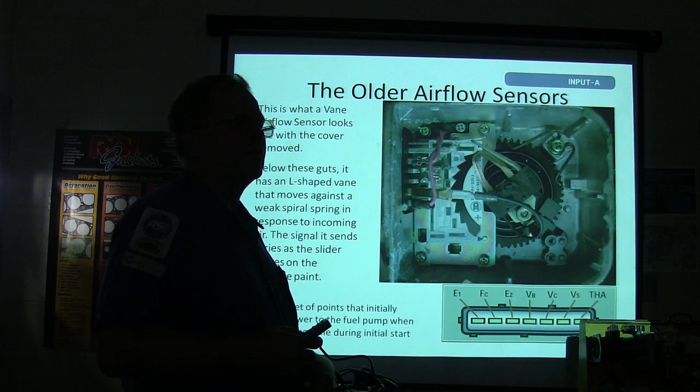Now I'll talk about airflow sensors. This is what an older vane airflow sensor looked like. This thing originally was a Bosch design, I believe. Whenever I was working at a Volkswagen dealership, there was a little screw on the side that you adjusted to trim this thing. We would actually have to put an exhaust gas analyzer on there, with a little port you stuck it onto, and you were supposed to turn that adjustment screw until your CO was at 1%. That was back in the 80s.

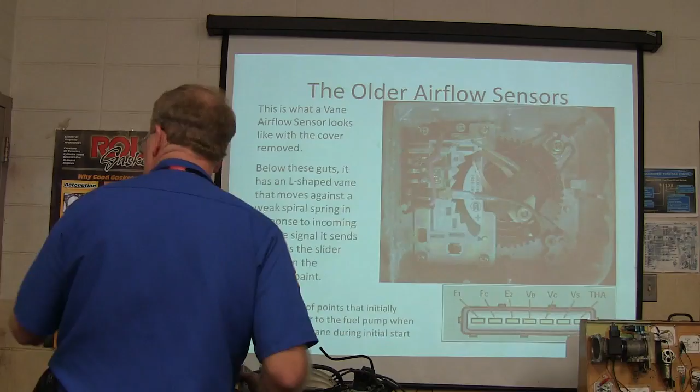But this particular thing, I want you to particularly pay attention to. There was an L-shaped vane hooked up underneath this, and as the air came through and moved that L-shaped vane, it slid on that resistive paint, and that gave you your voltage change. It's kind of like a TP sensor, but it was driven by air.

You notice this little stiff metal right here that's holding that set of points open. There's a little set of points there you can barely see. That set of points is activated if there was no air going through there. This particular one's made by Nippon Denso, but it's similar to all the ones that look like it. It would actually operate the fuel pump across these 2 points.

So these 2 wires right here went to the fuel pump. If you were going to unplug this thing and try to run the vehicle without it, you'd have to jump around those 2 wires at that connector. You didn't know which ones they were. Don't just indiscriminately be jumping wires at a connector because you think it'd be easy, because it won't be. You may burn something up like that. So be careful about which wires you jump.

Now it's got an L-shaped vane that moves against a weak spiral spring in response to incoming air, and the signal it sends varies as the slider moves on the resistive paint. You can actually reach in there and move that thing with your finger.

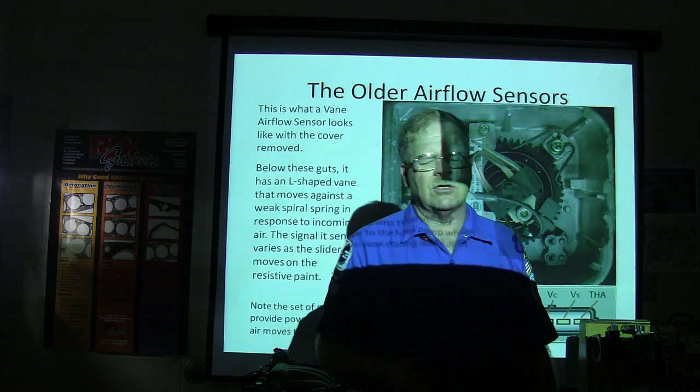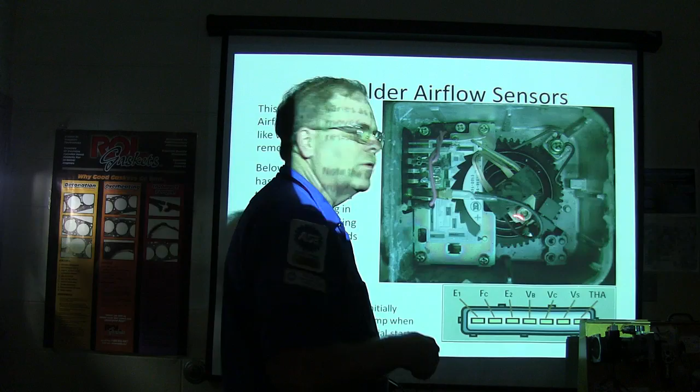Some of the older Volkswagens had it. The very first, there were some Escort GTs that had this kind of deal on them when I was working at Ford Place back in the early 80s. That thing right there is almost gone now. A lot of your Toyotas used it. This particular one I took a picture of was on a Toyota MR2 that we worked on here. That little set of points that operates the fuel pump right there basically gives you fuel to start with.

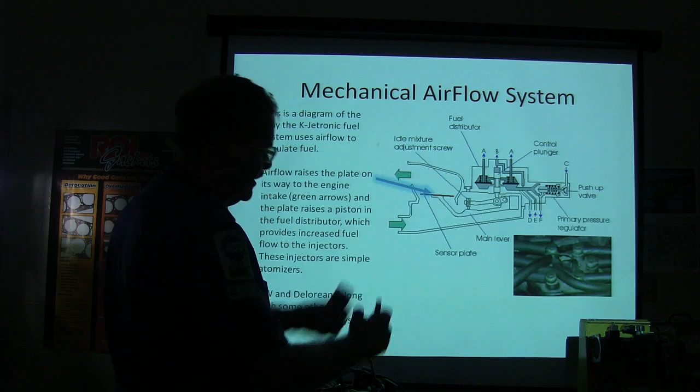Now this right here is a mechanical airflow system, right? It's a diagram of the K-Jetronic fuel system. What you got right here is a sensor plate. Air is coming in here, it picks up on that sensor plate, which is about as big around as the top of a 1-pound coffee can. It raises it up, and you notice this is the way it's shaped. The higher it goes, the less resistance it offers because air can go around it.

Right over here, that's an adjustment screw right there, and it's sitting on a little piston. That piston, as it goes up, opens up and lets more fuel go to the injector. There's a fuel distributor right here, and that doesn't turn or anything. It's just that each one of those lines goes to an injector. It's basically an atomizer.

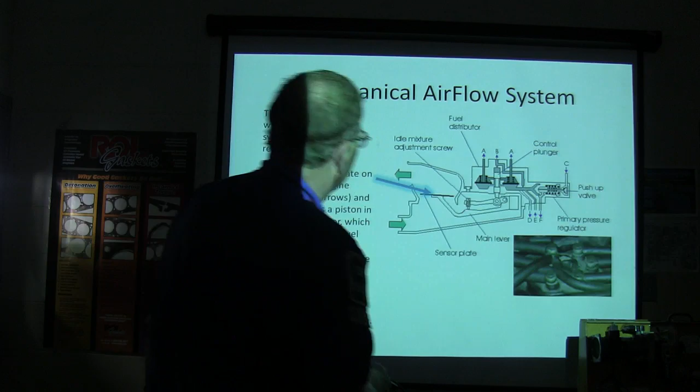So I worked on these over there too. This is one that was on the Volkswagen Rabbits that we worked on. Now the other ones I was working on were on the buses and some of the bugs and all that. But one way or another, there is also pressure right here — they're actually showing that pressure. This pressure right here is applied by something I'm going to show you in the next slide, and it has a specific job to do.

So you're basically looking at the way that the fuel distributor works, and those little ports that fuel goes through on the way out with braided steel lines going to those atomizers. This thing runs on about 70-80 pounds of pressure, and they basically have to be cut with lasers. I don't know, probably the same thing they do with regular fuel injectors.

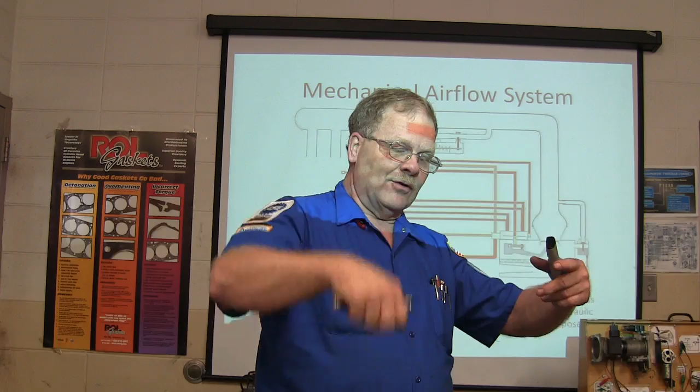You can pull them out and raise that thing up when the fuel pump's running and see them spray. You got to put them in a bucket or something. And that's a pretty neat thing.

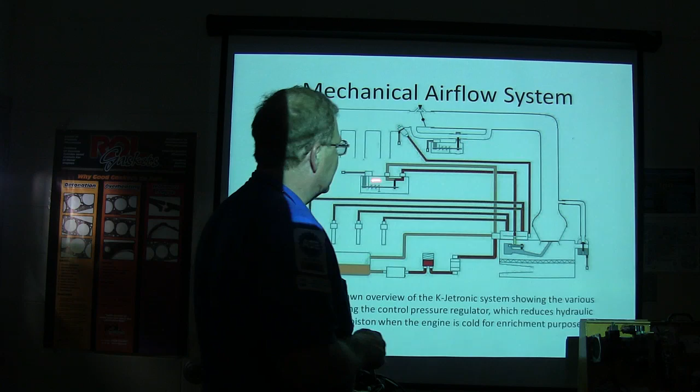Now this right here is what you call a control pressure regulator. When the control pressure regulator is cold, it reduces the amount of pressure that goes to that piston that hydraulically pushes down on it. It kind of resists this. If it reduces the amount of pressure when it's cold, it lets it come up farther and you get more gasoline for cold enrichment. Now that doesn't stay like that very long.

There's a little bimetal deal here that they drew, and wires coming in here, and whenever it heats up, that little bimetal strip closes this off and it gets to where it's got the full pressure on there.

This right here would be the cold start injector right there, and this is your throttle plate, and then that's a little idle air bleed and all that. That's a little overview of it.

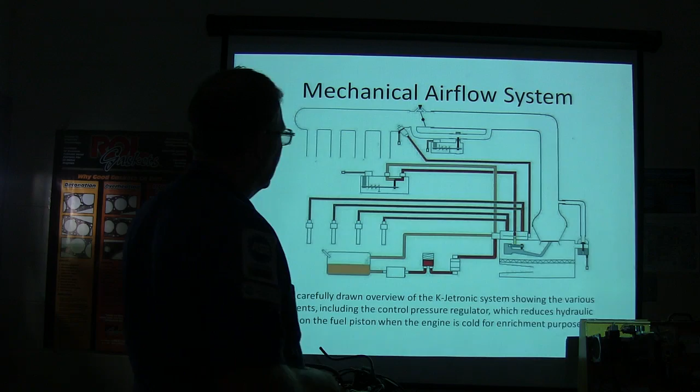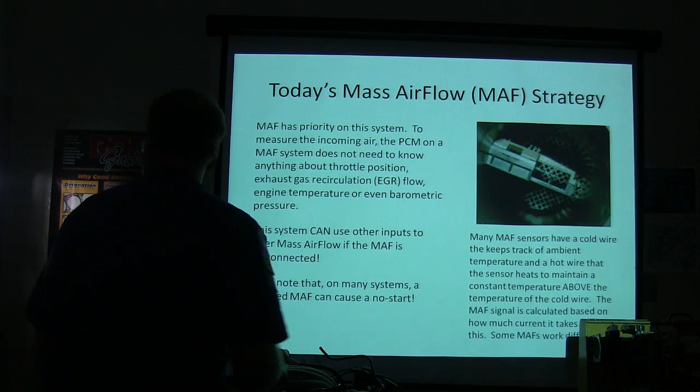One way or another, let's talk about today's mass airflow strategy. Mass airflow's got priority on these systems. To measure the incoming air, the PCM does not need to know anything about throttle position, exhaust gas recirculation, engine temperature, or even barometric pressure. It does infer barometric pressure, but it doesn't pay close attention to what it is, not like it does on the other systems. And it can use other inputs to infer mass airflow if the mass airflow is disconnected.

So if you disconnect it, if you think you got a problem with it, it takes care of it, like these can cause a no start. I used to see some Rangers and stuff, and I'd go out there, they wouldn't start, and we had a rash of them. You unplug the mass airflow sensor and it'd fire up, and it needed a mass airflow sensor.

A lot of them have a cold wire that keeps track of ambient temperature. You look down into the mass airflow sensor, you see two little wires. One of them's a cold wire. It's measuring the temperature that wire is, and it's heating the other one up to a constant differential. In other words, it's keeping it a certain amount of temperature, and how much current it has to apply to that little platinum wire is telling it how much air is going into the motor.

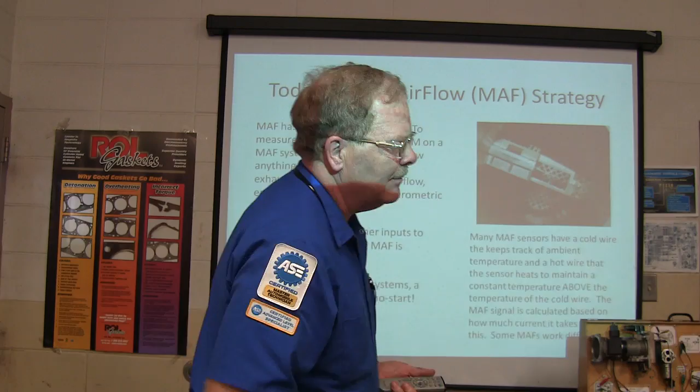That sounds kind of complicated, but the engineers were pretty sharp at designing that thing. Now, if somebody's got an air filter that's coming apart and crud sticks to those little wires, it's going to make it run sluggish. There was an 89 Mustang. 89 was whenever Mustangs came out with a mass airflow, and they didn't have data stream yet, but they did have mass airflow starting in 89. Didn't get data stream till 94 on Mustangs.

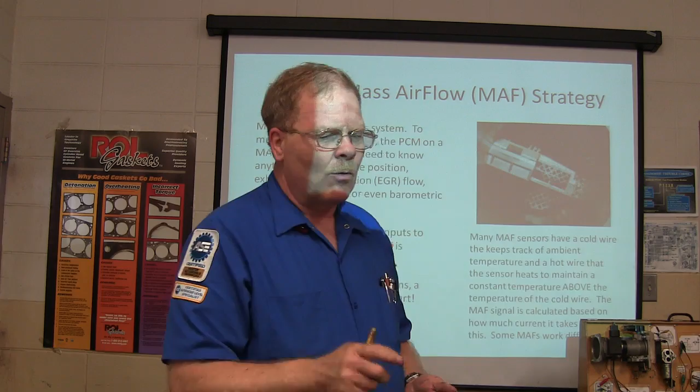Anyway, this guy had a convertible Mustang, and he said it just ran sluggish and all, and basically all I did was pull the mass airflow off and look at it down there with a flashlight, and you can see all this crud all over it, like fibers from old air filters and stuff, and I washed all that off, and it ran like a new car. I think he still drives that thing, and he fixed it 10 years ago.

All right, mass airflow sensors need power. You gotta have power feeding the mass airflow sensor. That is not reference voltage, that is ignition voltage. This mass airflow sensor is a device that has to be turned on by some good strong ignition voltage. If something else that's fed by this same fuse blows that fuse, then what you're gonna see here, you may pull a code that tells you got a bad mass airflow sensor.

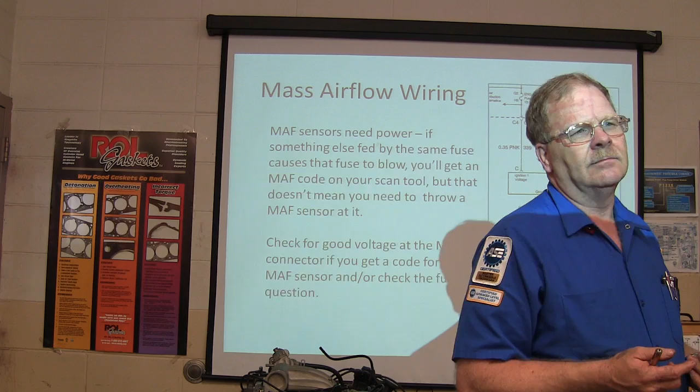In other words, the mass airflow sensor isn't putting out, and you're a dummy if you rush out there and have them order you a $175 mass airflow sensor and put it on, only to find out it's just like it was. Then the parts house says they won't take it back because they don't know if you might burn it up. Well, that ain't what was wrong with it.

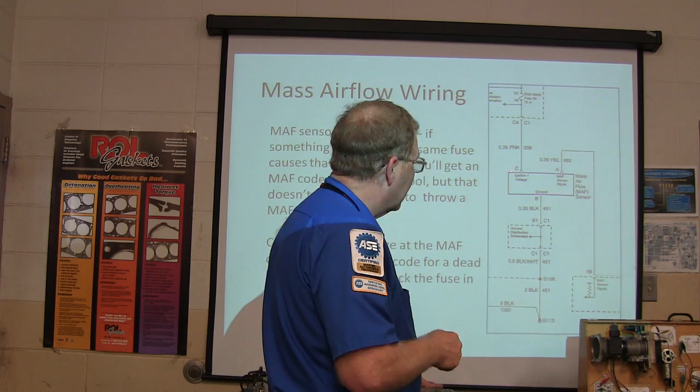So what you've got here, you need to find out if there's power there. See that, A, B, and C? Well, that's a GM. Terminal C is supposed to be hot. If it ain't hot, you need to find out why.

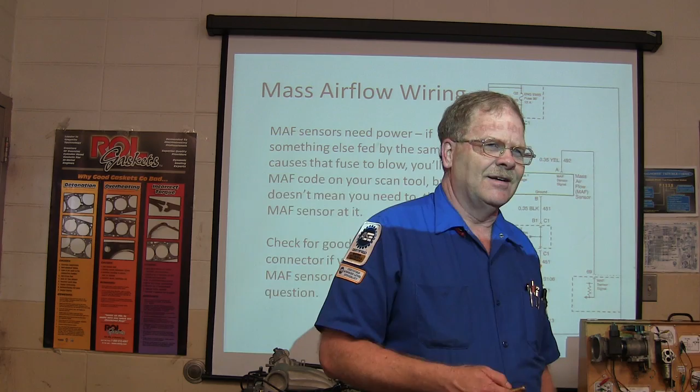If that fuse is popped—that fuse on the GM car also feeds the oxygen sensor heaters—I've seen a shorted oxygen sensor heater blow that fuse, and the only code we got was for a mass airflow sensor. You got it? All right.

Check for good voltage at the mass airflow connector if you get a code for a dead mass airflow sensor, and check the fuse in question.

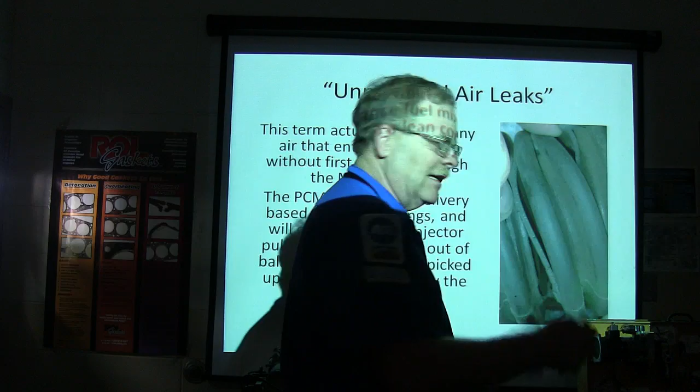All right, unmetered air leaks. This is what we were talking about earlier this week, remember? The guy said it was acting like a rev limiter. This is the kind of hogwash you see on these hoses right here.

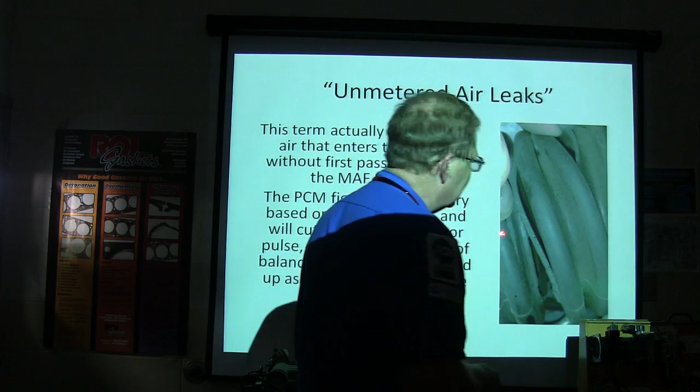Now you may pay $100 for one of those hoses, or you can do the Jonathan thing and wrap electrical tape around it, but the right way to fix it is to go ahead and replace the hose, replace the tube. It worked until Brian got one, so yeah.

All right, the PCM figures fuel delivery based on mass airflow readings, and will cut back on the injector pulse if you've got an unmetered air leak, and that causes an out-of-balance fuel mix that's picked up as a lean condition by the O2 sensor.

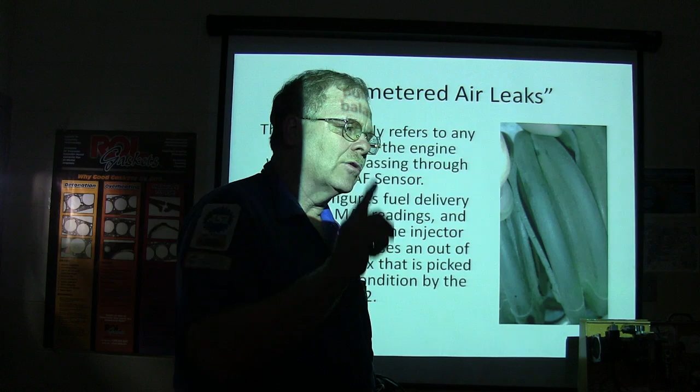So what kind of fuel trim numbers am I going to see if I've got an unmetered air leak? They're going to go high—it's adding fuel to correct for a lean condition. Make sure you understand that. They're going to climb when unmetered air leaks are present, holding the throttle open a little bit.

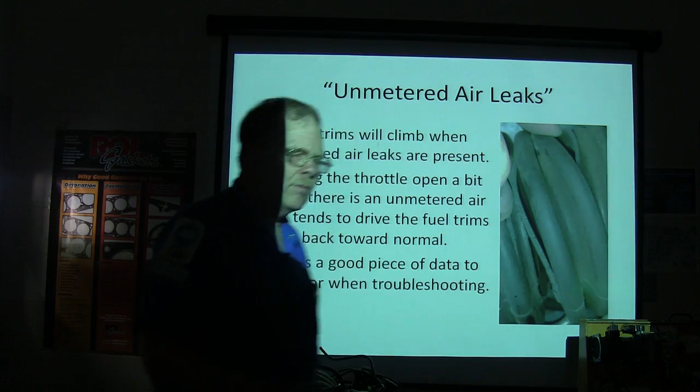When there's an unmetered air leak, raising RPM drives the fuel trims back toward normal because it sort of overwhelms the unmetered air leak. Now, if it's a bad enough unmetered air leak and it affects torque and makes it worse, you're going to feel it. But if you've got a small unmetered air leak, it's not changing because of engine torque. Whenever you raise it up and hold it at a higher RPM, if the trims come back to normal, that's a pretty good piece of diagnostic information because it usually points you toward an unmetered air leak or a vacuum leak, rather than some other kind of system.

All right, the PCM's focus—now think about this, you might not have thought about this before. The PCM cannot do anything about the air. It's totally dependent on whatever air is coming in. It can read the air, but it can't change it. You got me? Basically, it reads air. It needs to know what the air is, but if it doesn't like the air, it can do nothing about the air. That make sense?

It can change the fuel all the way from shutting it completely off. Remember the strategy I told you? This one guy, my lunch partner, told me that he asked if putting his Camry in neutral when coasting down these long hills would save him gas.

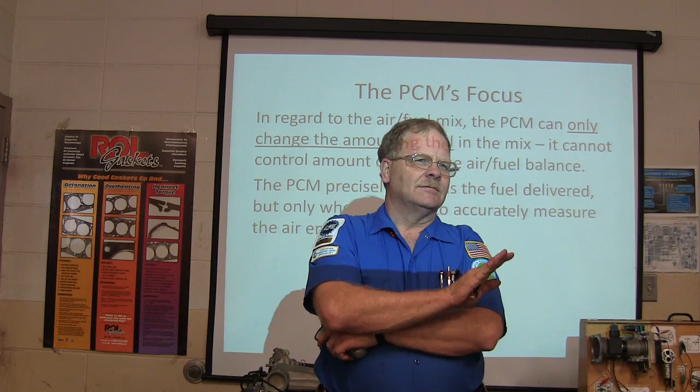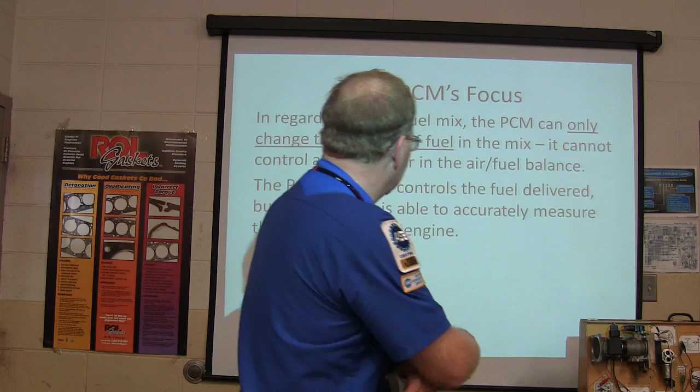Is it going to save gas that way? Because when you let off the pedal, it does the same thing - it shuts the injectors off at a calculated pulse width of less than 1.2 milliseconds at an engine speed greater than 1200 RPM. That's the way the algorithm used to be typed, though I don't know if they still type it that way. But anyway, the PCM precisely controls the fuel delivered, but only when it's able to accurately measure the air entering the engine.

So if the PCM doesn't like the air, it can't do anything about it. Now it can change, it actually dials fuel up and down. Now I will tell you this, why does it do anything with the throttle plate or the idle air control? What does it use those for? To control how much air goes in.

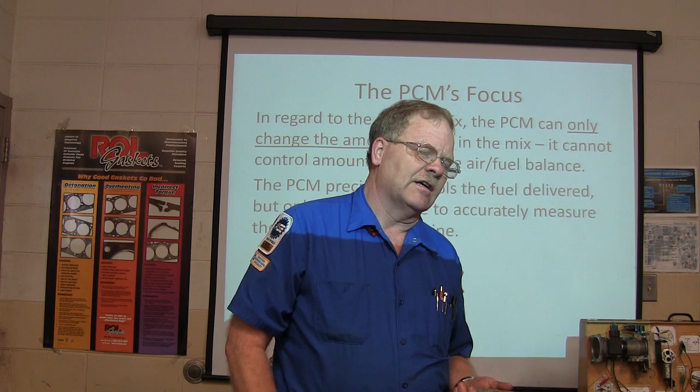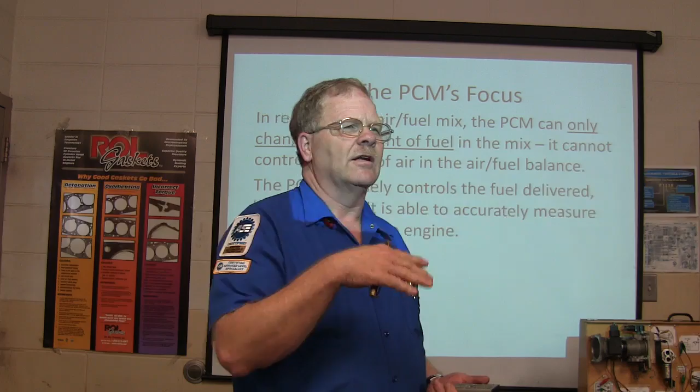I mean, why does it do that though? That's an obvious answer. Whenever it does, the idle air control takes up the slack of when the flap closes. Yeah, it keeps it from dying. It keeps it from dying because if you just let a flap close without having a little dash pot function, it'll die. But also, what else?

Why else does it move the throttle plate to let more air in? If you're not putting your foot on the gas, if it's making the decision and you're not, under what conditions does it open the idle air control or raise the throttle plate? So, to heat the engine up? Well, you're talking about fast idle. Is that what you're talking about? I mean, like when you first crank the motor up and it's cold. Yeah, that's one thing, fast idle.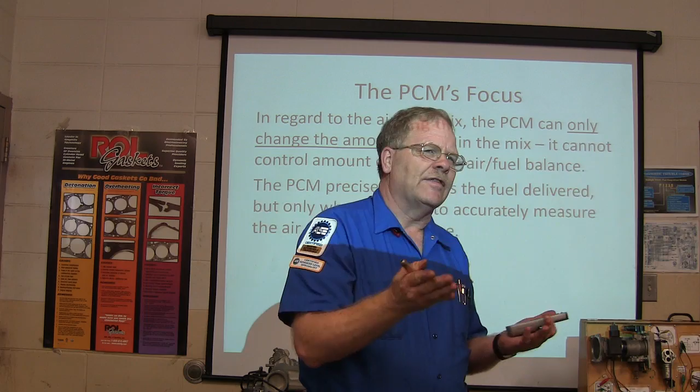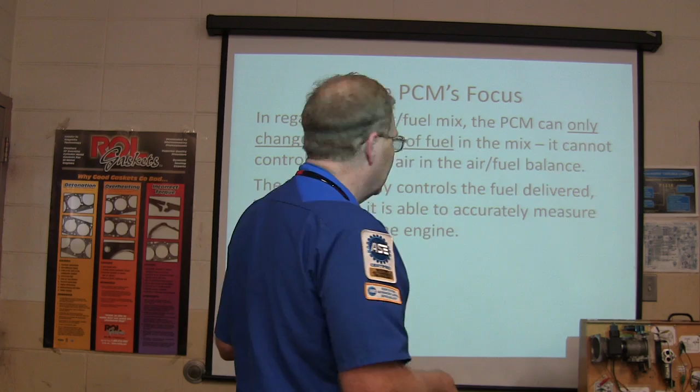That's one thing. But what about when you kick on the air conditioner? Yeah, engine load, power steering. It's going to open it up a little bit on that. See, there's other things - it does things with the air, but it's not because of the fuel mixture. It's doing things with air to control speed, not fuel. See what I'm saying? So it can't do anything about the amount of air coming in other than the fact that it can idle it up a little bit, or idle it down. Or cruise control is done not with idle air control, but with the electronic throttle body and a cable-driven thing that doesn't work anymore on the Taurus because somebody broke it off.

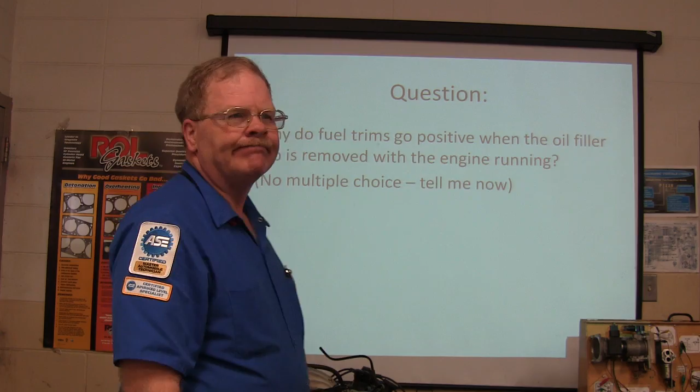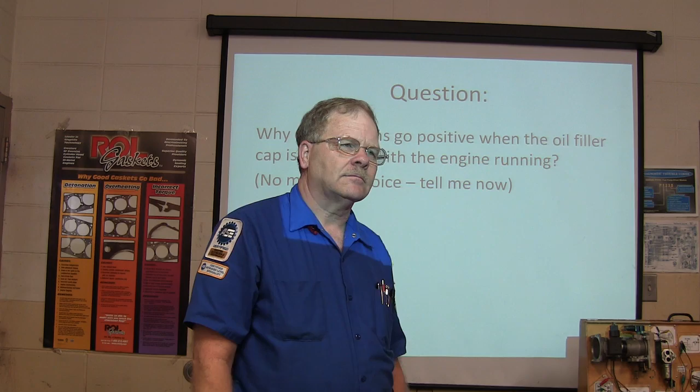Alright, well anyway, when you pull the cap off, it's sucking unmetered air. That's a good idea - how's it getting in there? Because it's sucking it through where the cap goes. How is what's coming in through the cap making it into the engine? Through the PCV valve. Aha! That's what I kept trying to get you to say - through the PCV valve. So the PCV valve needs a sealed crankcase so that every bit of the air going through the PCV is going through a metered source. It's being measured. That's why they put it in that hose between the mass airflow and the throttle body, so it'll meter that air as it's going in.

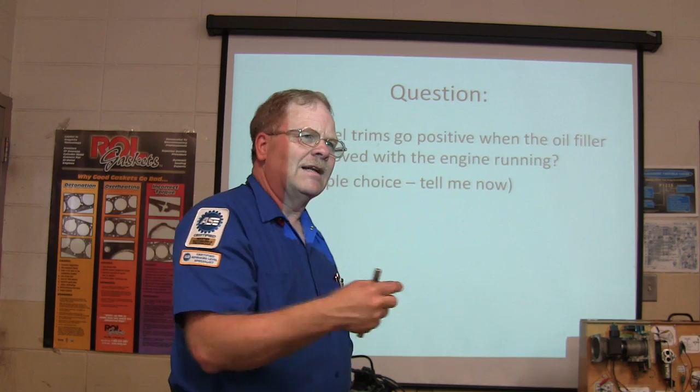You take the cap off, it can get a bunch of air through the oil filler cap opening. I mean, if you leave the oil filler cap off, it also throws a lot of oil out of the engine, and the customer's unhappy because it paints the engine compartment with oil. I have seen one burned up for that reason, so be careful about that.

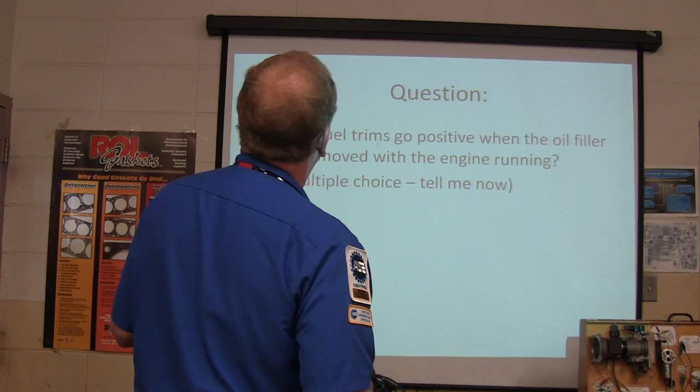All right, right here - speed density system. This method of fuel management uses a MAP sensor, but that's only part of it. Now, speed density - there was a book that came out back in '89, published by Mitsubishi, when we were selling those Eagle Summits and Eagle Talons, back when Jeep and Eagle were together, and I had part of that dealer franchise. They had a bunch of the most beautiful little verbiage on that, and a lot of people don't know it, but there is a density speed and there's a speed density. Depending on your priority, there's density speed and speed density.

Most of the time people just lump all those together, but some of them, like your Jeep Cherokees, the 87 to 90 model, with the Renix fuel injection system they had, unless I missed my guess, I think that one was density speed, and most of the rest of them are speed density, so don't get too confused by that.

That's basically the one that uses a map sensor. But the crank sensor is given a good bit of priority, because if it knows how fast it's turning and it knows what the displacement is, it can kind of figure things out.

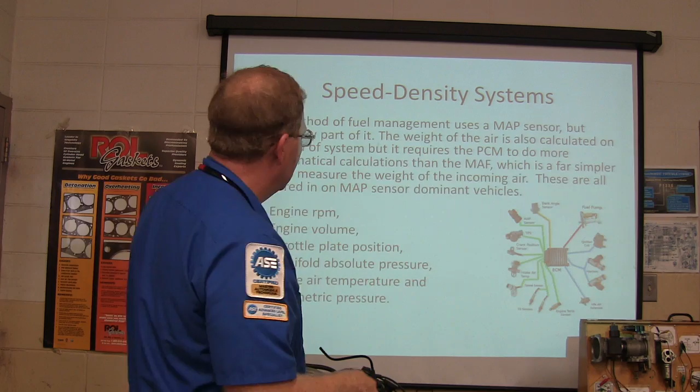These are all factored in on MAP sensor dominant vehicles: RPM, speed, density, engine volume. What's engine volume? I'd say that's the displacement, right? How much air is going to try to go through there every time you turn it two times? If it's a 4 liter, it'll be 4 liters of air. Throttle plate position, manifold absolute pressure, intake air temperature, and barometric pressure. All that stuff's factored in.

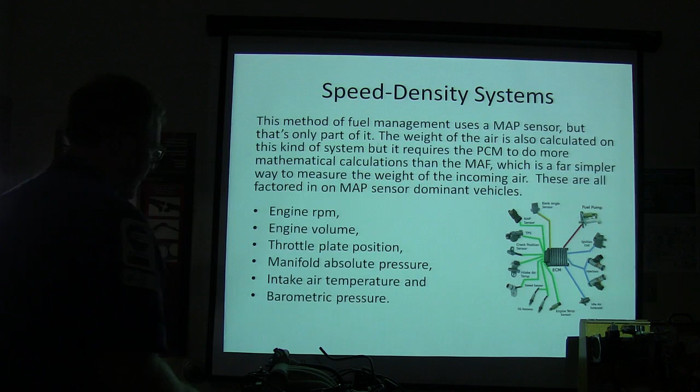It's really nasty. This is a favorite failure on some of your V6 GM cars, like your 3.8s and 3.1s and all that kind of stuff in the old ones. That little diaphragm loves to rupture.

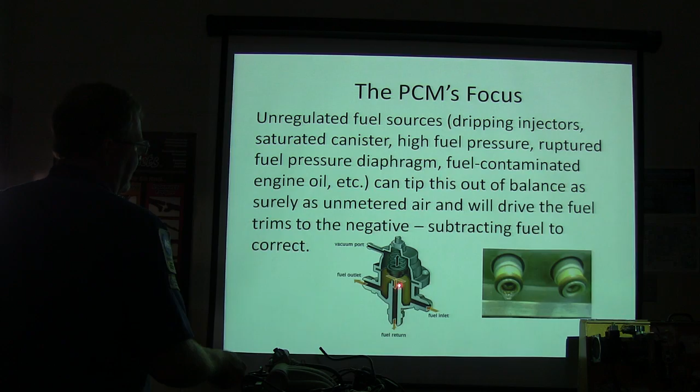Well, yeah, it subtracts fuel to correct any time there's anything rich. If this little sucker sticks and it cannot move - and I've seen this before, that spring gets all rusty and everything, or something goes on in there.

I can cut one apart. I've actually seen them where they were talking about puffing black smoke and all, and I'd check the fuel pressure, and even if I saw like 40 pounds of fuel pressure, or 35, or whatever to start with, I'd reach over and just tap really gently on the fuel pressure regulator, and it bounced to 100 pounds.

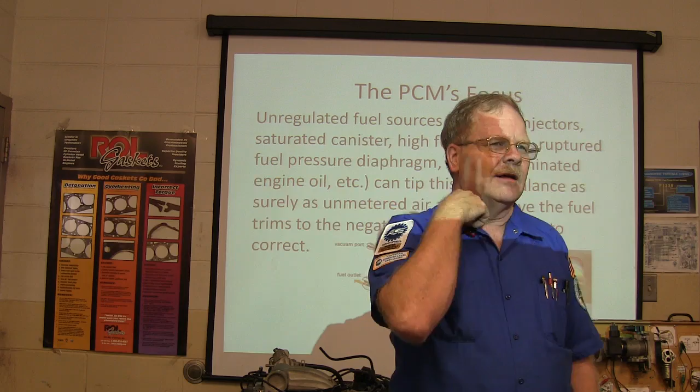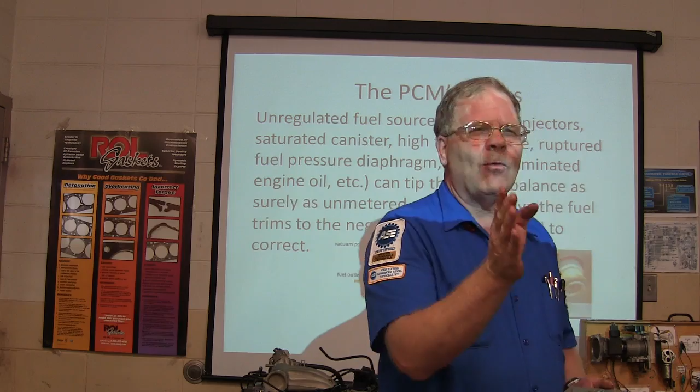And you knew you needed a fuel pressure regulator. Now, like I say, if you check it real quick, one of the worst things you can do is have a problem that's fuel pressure related but not check it while the problem is present. If you just hook up the fuel pressure gauge, go 'oh, got good pressure,' pull it off and throw it on the bench, and then the fuel pressure concern happens when you're not looking - if you're not watching it while it happens, you may misfire on your diagnosis.

That's why if you're checking an electrical problem, you need to have some indicator - a light, a buzzer, or whatever it is you're working with - that's going to light off if that problem happens. Like if I'm pulling on a wire harness and I've got a test light set up so it'll come on when the wire harness short happens, and I'm watching the test light while I'm manipulating the harness, all of a sudden - boop, boop - there it is. You can go right to it that way. Anyway, you need to be watching it while it happens. That's the point.

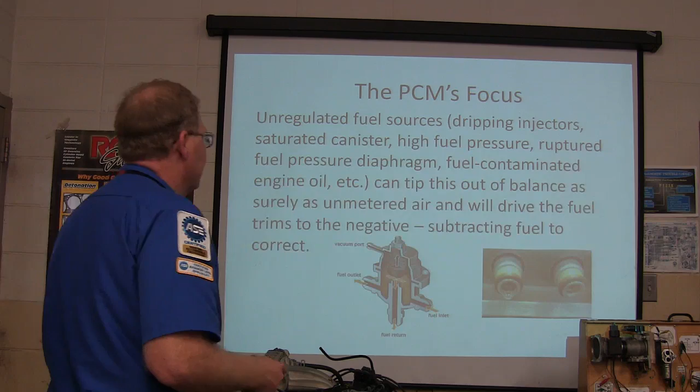Short fuel trim: instantaneous fuel pulse width adjustment to what the O2 sensors are telling the PCM. Short fuel trim is what it's doing right now. If you watch the little camel hump of the oxygen sensor going up and down, you'll see the fuel trim following right behind it.

The short fuel trim follows right behind it. The long fuel trim is the adaptive memory part of the picture, and long fuel trim makes coarse adjustments to the fuel delivery algorithm.

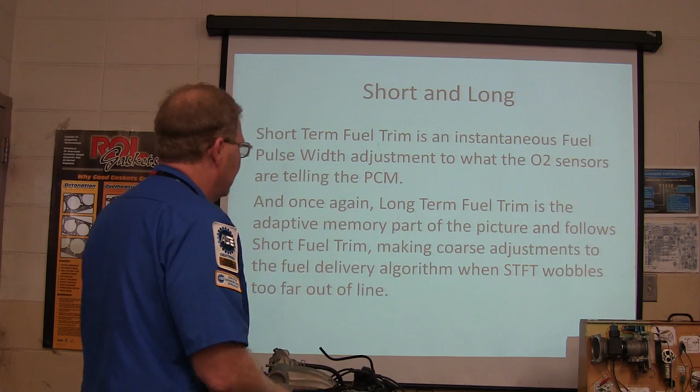Long fuel trim's at 0, short fuel trim tops out. Long fuel trim says my little friend is not able to handle this, so it starts clicking up and adding more fuel, changing the formula all the way up. And when it gets up in that range, the short fuel trim goes back to 0. Whenever you're looking at a system on the scan tool and you see long fuel trim way out of kilter, you're probably going to see short fuel trim close to 0.

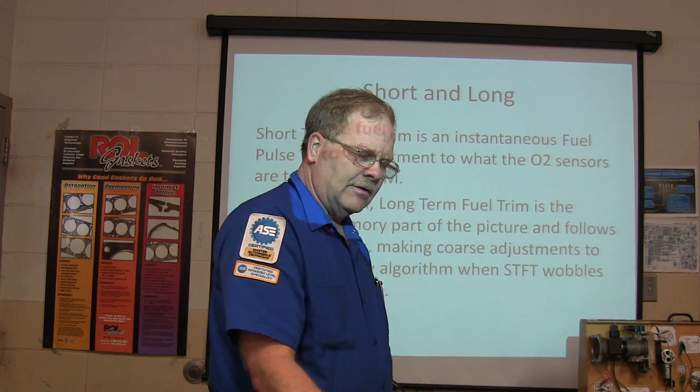So if short fuel trim is close to 0 and long fuel trim is way out of line, you need to go find out what's causing it - correcting for a rich condition or a lean condition. Most of the time, you'll be correcting for a lean condition.

Now let me ask you this: what did you see for fuel trims on the Chevy? Remember when we first started looking at them? Did you write that down? Yeah, they were positive, weren't they? You were seeing plus 25 consistently. When we got through working on it, they were 0 - long fuel trim and short fuel trim were both 0.

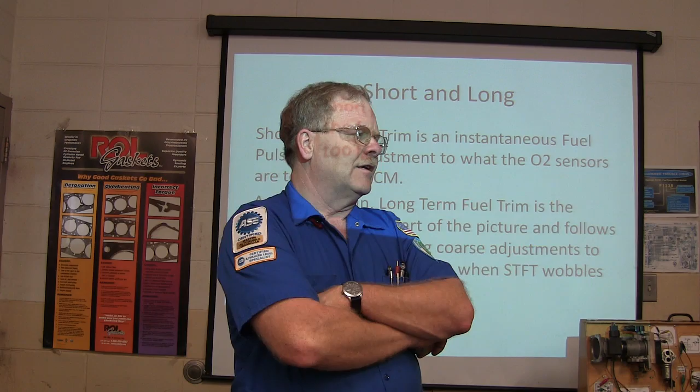Why were they plus 25 on the 4.8? Remember, 3 of the injectors were totally clogged, so it couldn't put a drop of fuel in 3 of those cylinders, and that was driving it lean. Now if it's driving it rich, you may have 3 of them dripping. See what I'm saying? So there we go.

Alright, just remember how that worked.

Now, for the people that like to spend lots of time enjoying the cool AC, sitting in the car pretending to look at the scan tool screen - there's quite a few people like that. I go over there and say, what are you doing? I'm helping him, I was telling him the other day, the oldest trick in the book. I say, what are you helping him do? Oh, we're doing this. Then I turn my back and walk away, and when I glance back over there, he's standing there shooting the bull again. Or if I go over to the car and somebody's sitting there, or at a computer with nothing on the screen except one little piece of text he could've read 10, 15, or 30 times, and his head's buried in his cell phone. I go in, tap on the glass, and say, yeah, I got that - pointing at the computer screen. It's like pointing at the scan tool screen - the phone disappears whenever I walk over.

Anyway, there's only so much you can figure out sitting on your fanny with a scan tool. Sometimes I give one to somebody and say, I need you to find out what's going on with this car, it runs like crap. Well, the car's running like crap, the hood's closed, somebody's sitting in the car just looking at the scan tool for 30, 45 minutes. What are they learning?

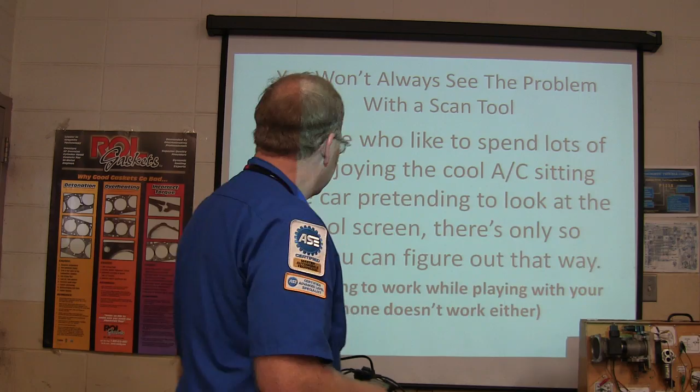I don't know. I don't spend that much time looking at a scan tool without opening the hood and at least looking around under there to see what I can see, you know what I mean? I want to get my hands on something. Pretending to work while playing with your phone doesn't work either, okay?

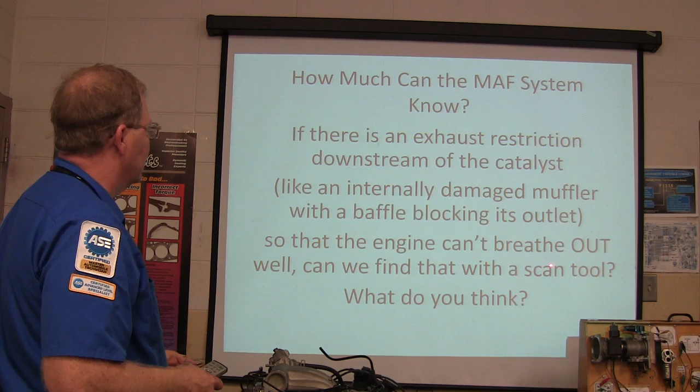Now, how much can the MAF system know? If there's an exhaust restriction downstream of the catalyst, like an internally damaged muffler with a baffle that's partly covered, the engine can't breathe out. Can we find that with the scan tool?

Or you could watch a fuel trim. Can you? Look at here - on this Ranger, Albin Moore, who also writes for Motor Age like I do, put a man-made exhaust restriction in place, and it exhibited low power, and the only PID that changed was the load. He put an exhaust restriction in there - I don't know if he put a potato in the tailpipe or whatever he did - and it was reading 74% when it should be reading closer to 95%.

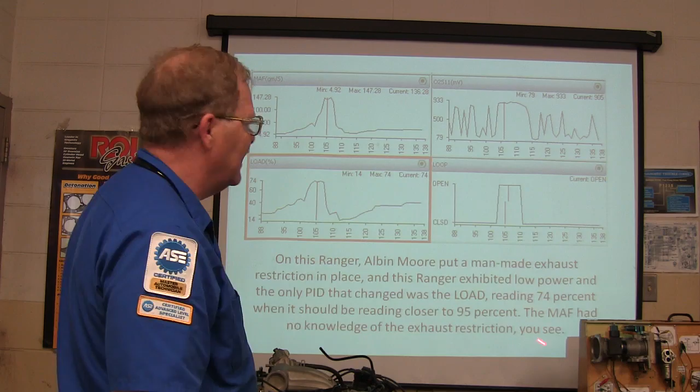Right, that's the only thing that changed was the load. You gonna go look at the load and tell me you got an exhaust restriction? I don't think so. The MAF had no knowledge of the exhaust restriction.

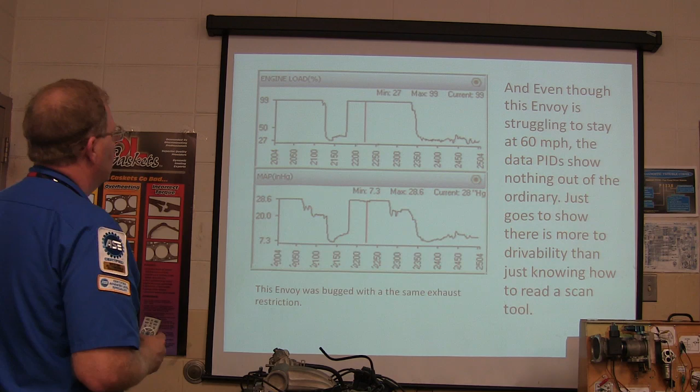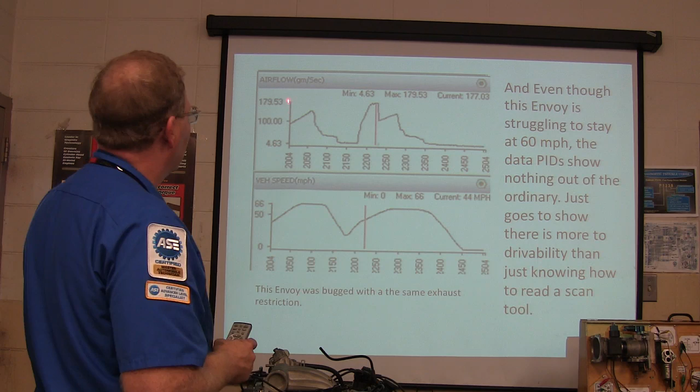And look at that right there. Closed loop. It basically did power enrichment right there. Now right here we got airflow. So your airflow is 179, which went up pretty strong. And your vehicle speed, they were really busting their fanny on that, as fast as they ever went, with 66 miles an hour.

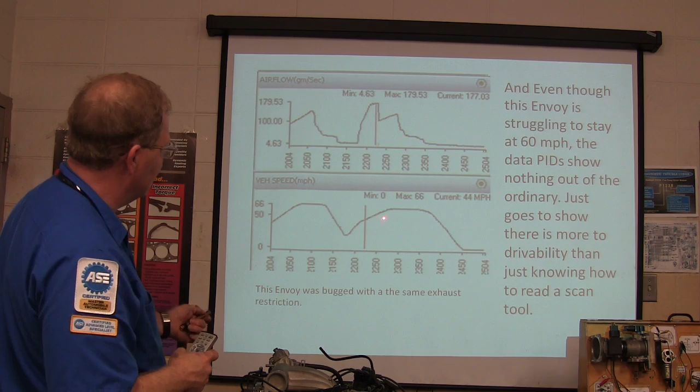Now the Ranger, he did the same thing on his Ranger. It barely even noticed the plugged exhaust, and the scan tool PID didn't show it either. See there? See what you got going on there? There's your load, there's your mass airflow in grams per second.

Do you see, notice you got minimum, maximum, and current. Current is what you're seeing now. Maximum is as high as it's ever been, and minimum is as low as it's ever been. Fuel trims, they weren't really so terribly bad. They were a little down, but not much.

All right, so here you got your oxygen sensor. It went rich, just like the Envoy did. It dropped into open loop when he went to wide open throttle. And here we go with your long fuel trim. Now, long fuel trim went up to 8 when it was in open loop and he was at wide open throttle

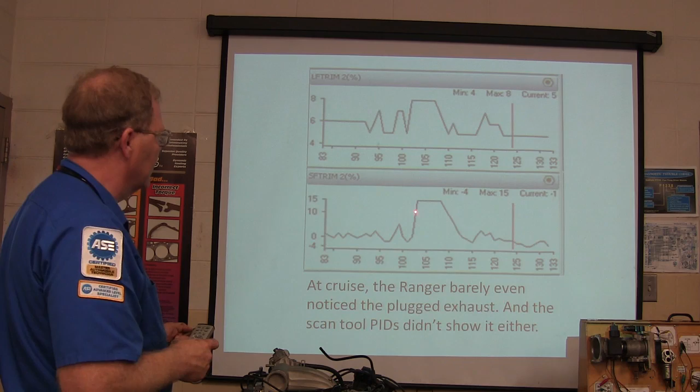because he was at power enrichment. Short fuel trim did too. O2S1 mirrored O2S2. So it's wise to get accustomed to what the scan tool data looks like when there's a vacuum leak, and the effect is slightly different.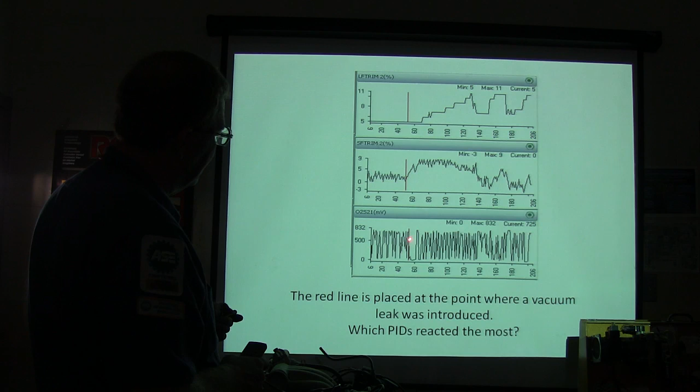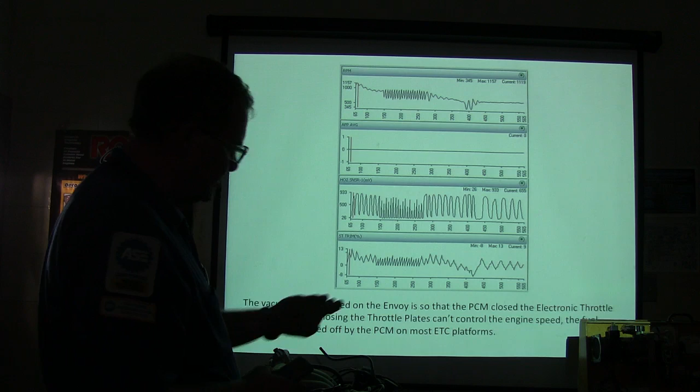And here we are, once again you're looking at the same deal here. Long fuel trim 2, notice that short fuel trim immediately went high. This one here just briefly went lean. The vacuum leak created on the Envoy causes the PCM to close the electronic throttle plates because of the idle speed control, and it picked up when closing the throttle plates can't control the engine speed.

Now listen to this, this is important. The injectors are turned off by the PCM on most of the platforms. If it can't control the idle speed, it gets scared that you're going to crash and burn, and it shuts it down. The vacuum leak was really bad.

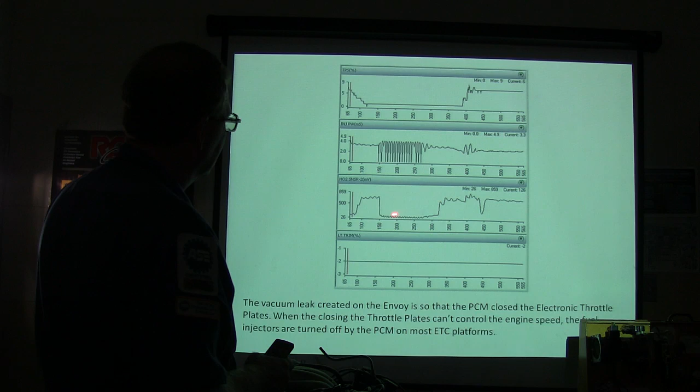And see, as you can see TPS right here, it went off. Injector pulse width, see how I was jacking around with that? Oxygen sensor went really, really lean when it did that. Now, early GM vehicles back in the 1980s dumped MAP in favor of MAF.

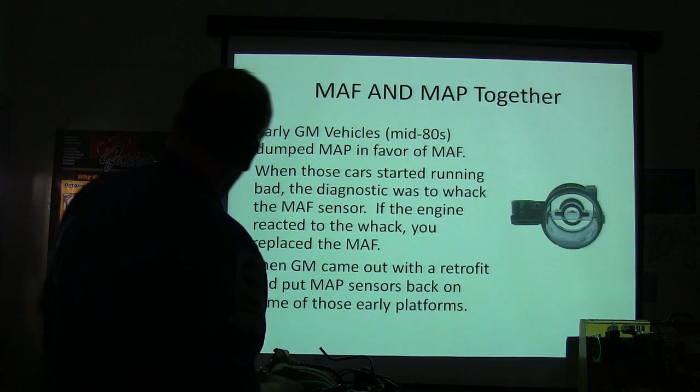It had a kind of a burn-off circuit. When you turn it on, it'd get really hot and burn the dust off of it. It's really cool to watch that.

But whenever it wasn't running right, GM said to whack the mass airflow sensor and see if it ran better. And if it did, you had to put a mass airflow sensor on it.

Then they came out with a retrofit and put MAP sensors back on some of the early platforms. But a lot of them today have a MAP and a mass airflow sensor, right? Some, like most Chrysler products, though, stayed away from mass airflow and stayed with MAP.

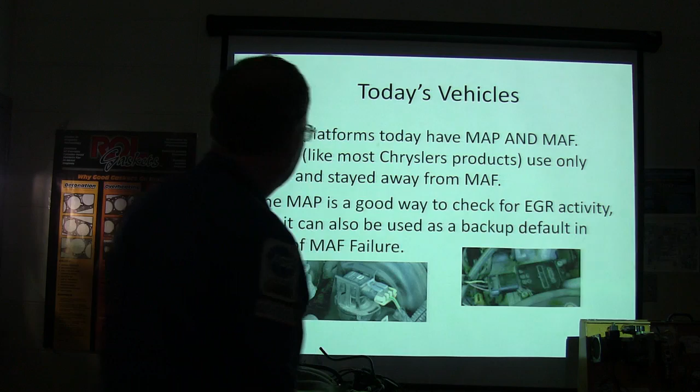Now, MAP's a good way to check for EGR activity, but it can also be used in case of mass airflow failure. That's what the MAP sensor looks like, and there's your mass airflow up on that Oldsmobile.

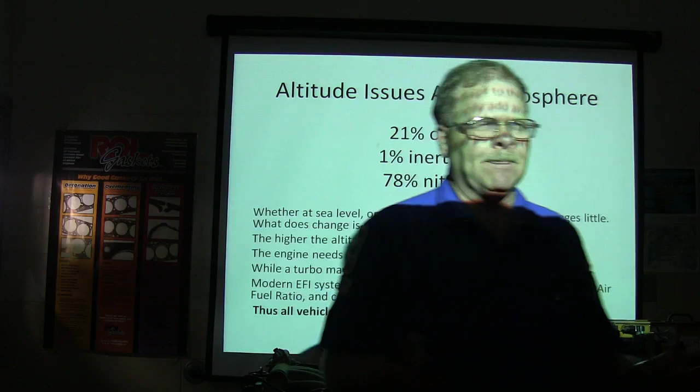Altitude issues in atmosphere, you got 21% oxygen, 1% inert gas, and 78% nitrogen. Whether you're at sea level or at the top of a mountain, the mix of the air is the same. It's just that there's not enough pressure, and the engine needs pressure differential in order to get that air to come on in. If you got lower pressure, like if you're really high altitude, you're going to notice the car running like a three-legged dog.

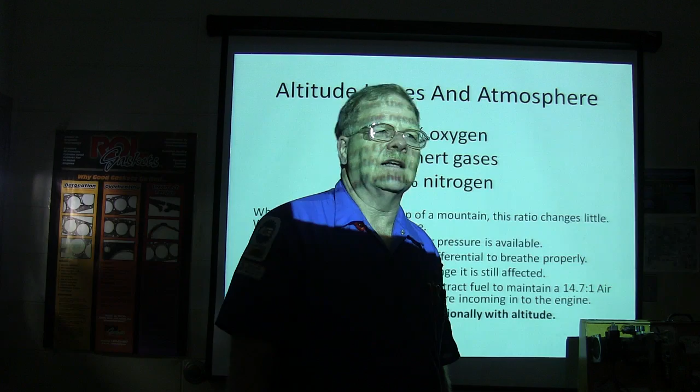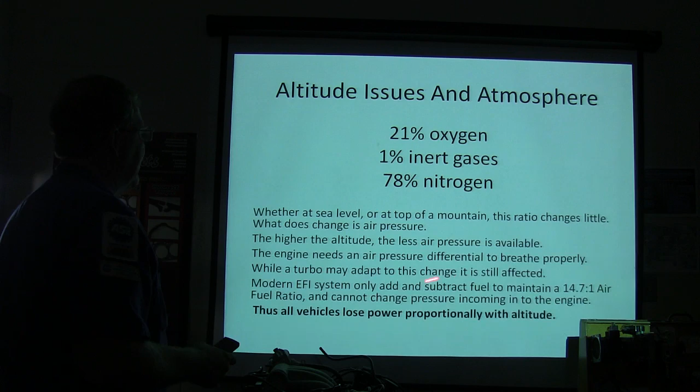All right, so while a turbo might adapt to this change, it's still affected. So a modern EFI system can add and subtract fuel, and all vehicles tend to lose power proportionally with altitude. If you go high enough, it won't run at all.

In the old days, vehicles that were going to reside at higher altitudes needed altitude modifications, ignition timing and fuel mix changes to minimize power loss. Electronic fuel injection systems also need mods for altitudes above 4,000 feet.

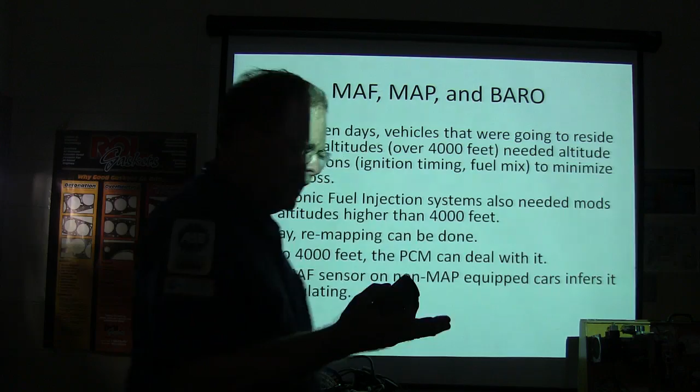Up to 4,000 feet, the PCM can deal with it, but the mass airflow sensor on a non-MAP vehicle infers it by calculating. This is what MAP sensors look like.

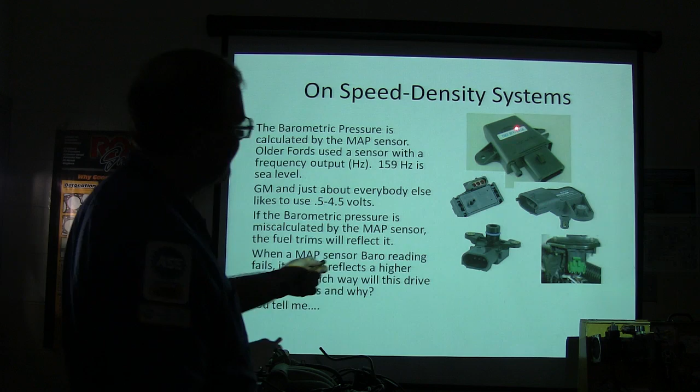This one here is a Ford one that operates on a frequency. On this frequency right here, 159 hertz when you first switch on the key is sea level, more or less. And then whenever you crank it up, it's reading it through the manifold through that hole right there. When you crank it up, it's basically going to drop down to about 110 hertz usually. And you got to have a meter that'll read hertz if you're going to measure that.

These other ones measure voltage, and some of them go right into the manifold, some of them have a line hooked to them and all that.

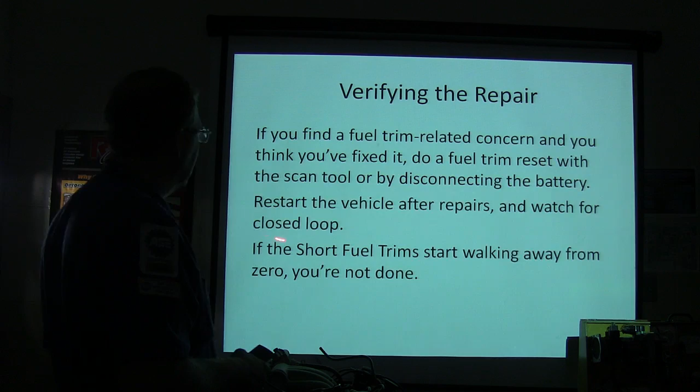Now, if you find a fuel trim related concern and think you fixed it, do a fuel trim reset with a scan tool or by disconnecting the battery. After you're done with your repairs, restart the vehicle and watch for closed loop. When closed loop happens, if the short fuel trim starts walking away from zero, you're not done. You're going to have to go back and work on it some more.

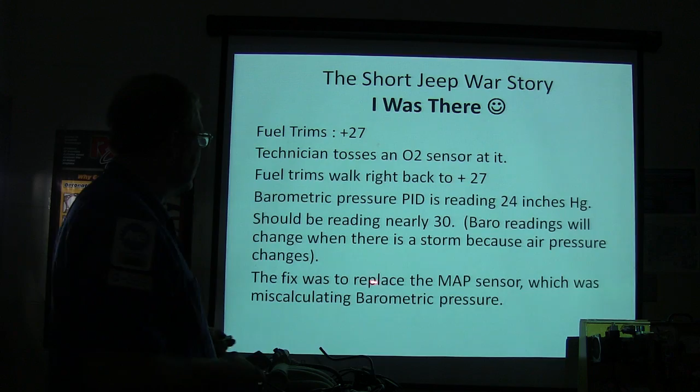Fuel trims plus 27. I was there. Technician tosses an O2 sensor at it. I'm not the one that did this, okay? I'm not saying I've ever put a part on wrong. I was not going to fix it, but anyway, I didn't this time. Barometric pressure is reading 24 inches, should be reading nearly 30. Baro readings will change when there's a storm, so don't be confused by that. And when pressure, the fix was to replace the MAP sensor, which was miscalculating barometric pressure. He was thinking since we'd seen so many oxygen sensors fail, that's what it was.

You got that? Everybody happy with that? Everybody knows something now you didn't know when you came in here. Did you like digging deeper into the fuel trim? Were you bored with it? You all look like a bunch of skeletons. All right, I needed some donuts. That's the end of the slideshow.

All right. Whoops. All right.